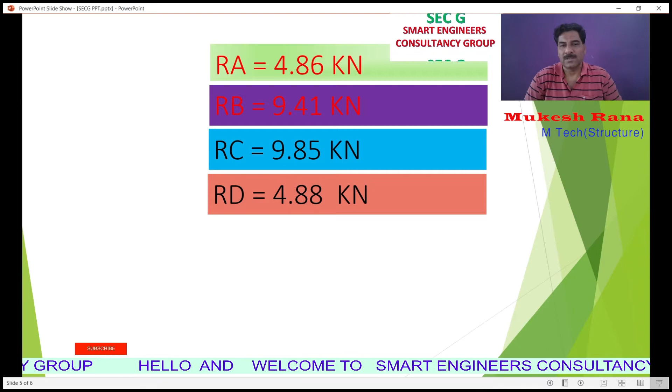As you know, point A and D are simply supported, so moment at this point will be 0.

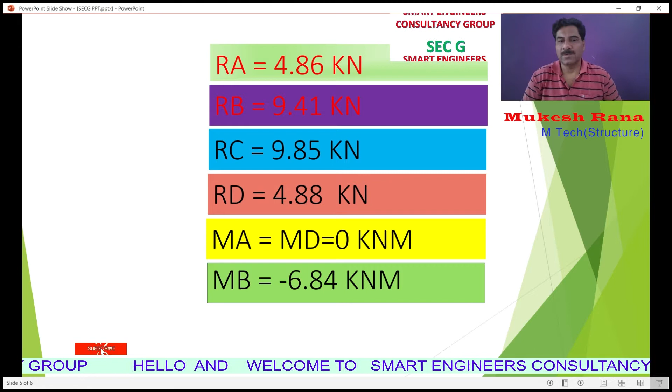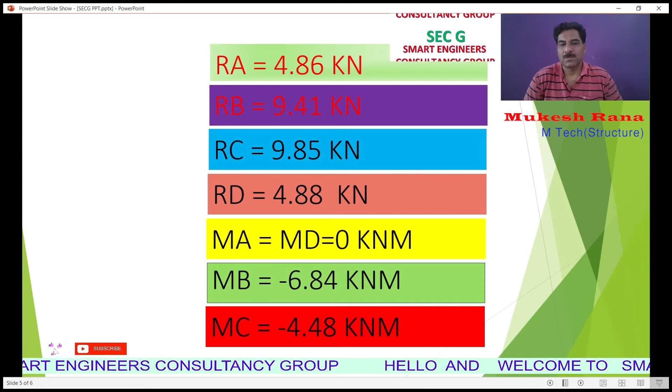Bending moment at point B will be minus 6.84 kilonewton meter, and bending moment at point C has come out minus 4.48 kilonewton meter.

Let's start the same problem on the software STAAD.Pro CONNECT Edition V22. Okay friends, so we have come to our software panel.

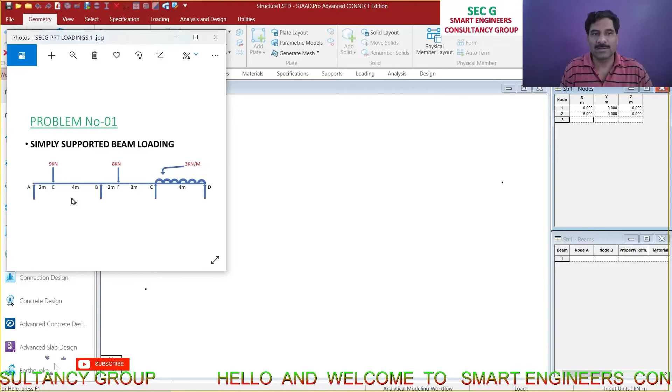So I will provide here 0 0 0 first of all. After that I will provide 6 0 0. After that you can see I will provide 11 meter, so 11 0 0, and after that is 15 0 0. Now you can see 4 nodes are created.

So you go to view, go to front view, and select the node cursor and make your beam. Now you go to geometry, go to beam layout, click here on OK. Now you can see your 3 beams A, B, B, C, C, D are created.

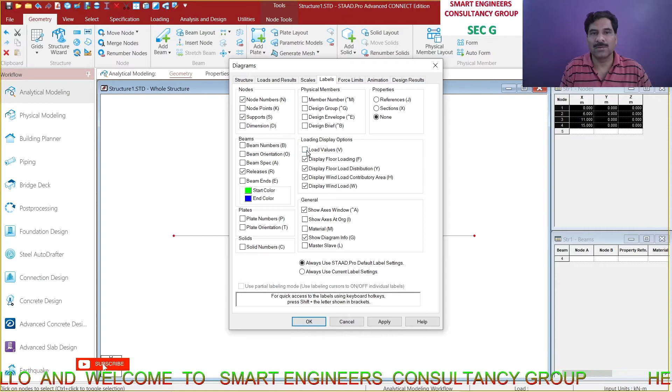Now if you want to give node numbers, then click on labels, click on node number and load values also, it will be utilized later. Now apply, click on apply, click on OK. Now you can see 4 nodes A 1 2 3 4 have been created for these 3 beams.

If you want to show the length of this beam, then go to utilities, click on beam tools, click on dimensions, click on display, and you can see your 3 beam lengths are displayed here. Click on close.

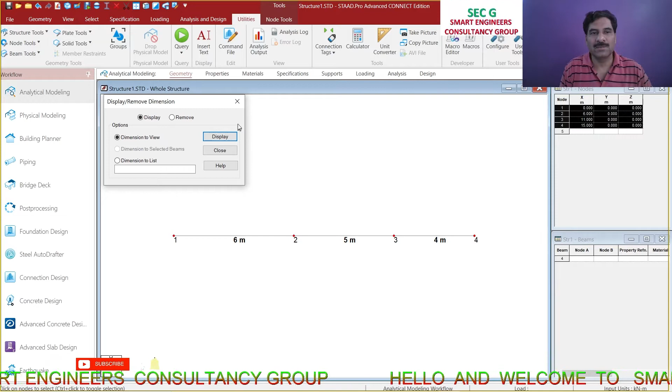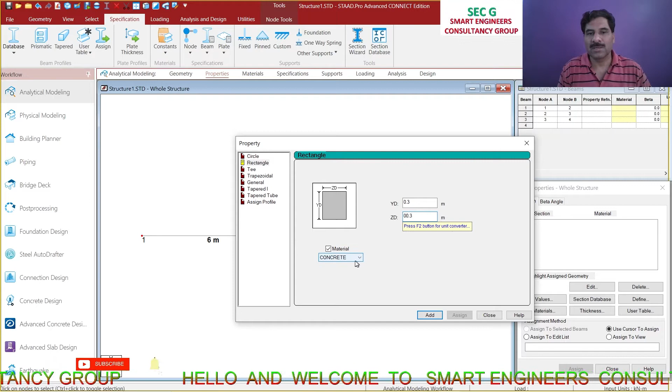Now we have to provide properties for these beams. So click on property, click on define, click the rectangle or whatever section you want to give. Now I provide section 0.3 meter by 0.3 meter, and I have selected concrete here, or whatever material you want to select from here. Now click on add button and click on OK.

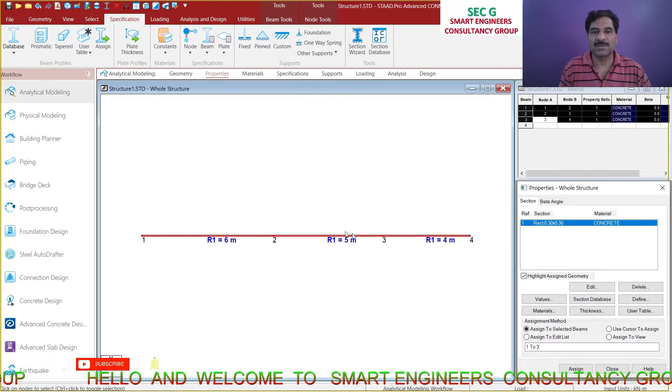Now you can see this concrete material has come here, so now we have to assign it. So select it, click on assign to view, click on assign and click on yes. Now you can see all 3 beams are assigned with this concrete material.

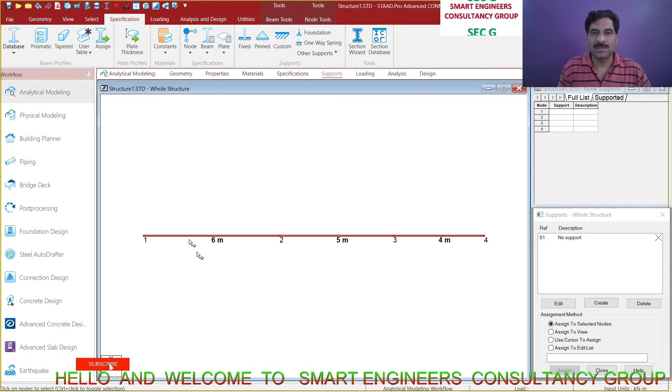And for the next step I select supports. Here we provide the supports for our beam. As all supports are simply supported, I will click on create. I will select fixed but release in other directions except Fy, because all these supports are fixed in the Y

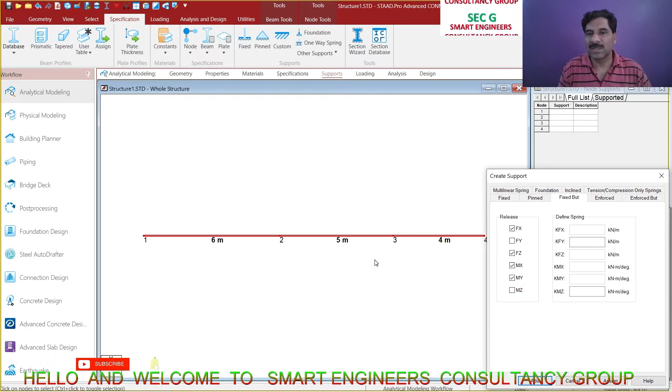direction. So I will click on add, select support and click on assign to view. Click on assign, click on yes. Now you can see your supports at 1, 2, 3, 4 are assigned here. Now we have to provide loading.

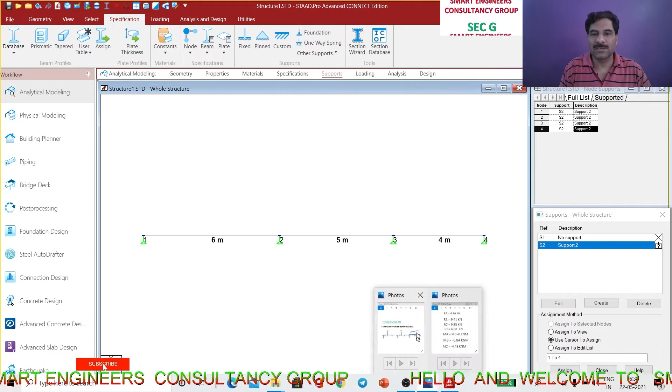For loading, if you look at the figure, you can see a 9 kilonewton load, 8 kilonewton, a 2 meter distance is given, and a 3 kilonewton per meter UDL is here. So I will select loading. Click here, click on add and give whatever name you want. I will provide live load here as LL. I will click on add.

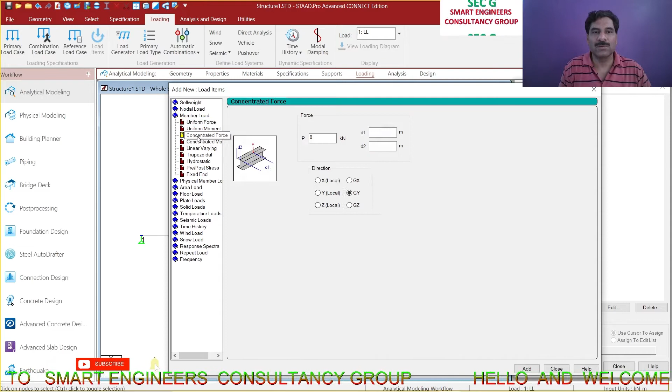Now close it. Now click live load, click add, click member load. Now if you want to give a point load, go to concentrated force and provide, as you can see, 9 kilonewton and 8 kilonewton. So you provide minus 9 kilonewton at a distance of 2 meter, d2 0, and in direction Fy global Y. So click add.

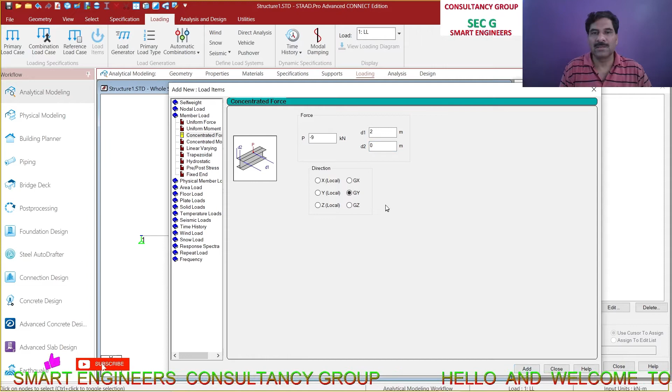Another load was 8 kilonewton and the distance was the same. You can see here it was 2 meter also in beam 2. So this is right here. So click here and write 8 and click on the add button.

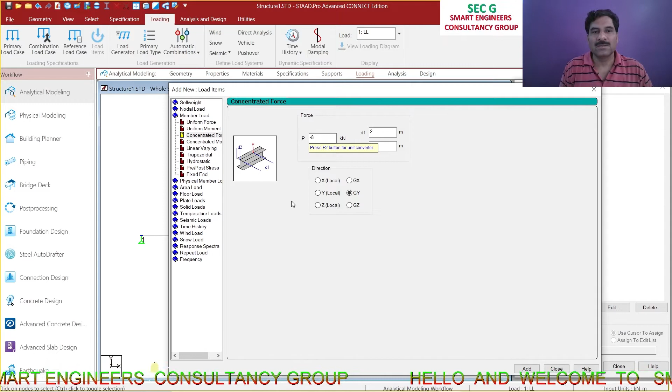Now we want to provide the UDL. So we will go to uniform force, enter minus 3 kilonewton per meter, and there is no need to write any distance, as the whole beam is provided 3 kilonewton per meter. We will select direction global Y and after that click on add, click on close.

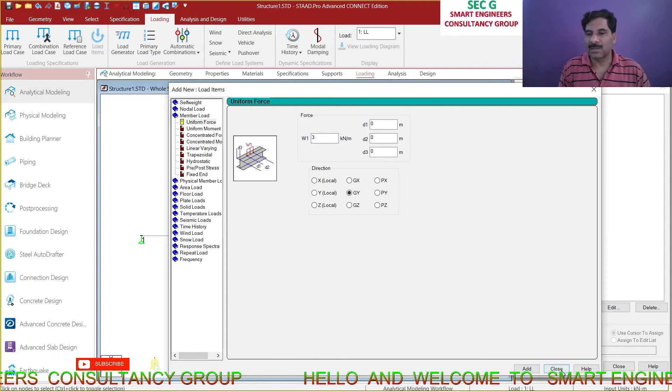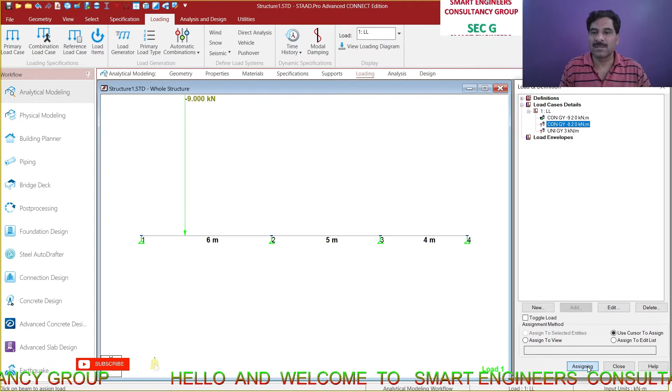Now you can see these 3 question marks are here. It shows that these loads are not yet provided. So select the first load, use cursor to assign, and assign it to beam number 1. Click here, then follow the same procedure for the second beam. Select it, assign, go to beam number 2. Select the third load, assign, go to beam number 3.

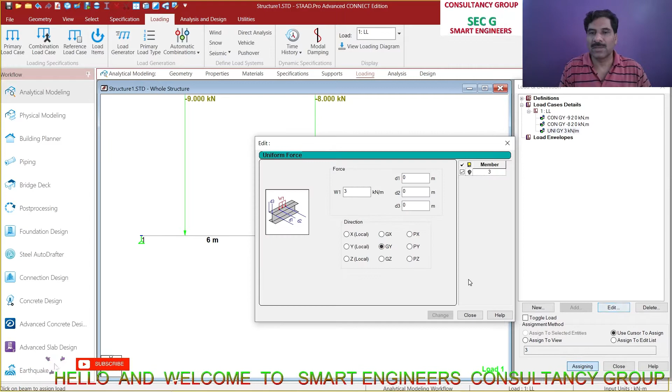Now you can see this force is in the opposite direction because we have not provided minus here. So we can add it: click on edit, enter minus 3 and click on change. Now you can see the load has changed direction. You can change the direction of your load in whichever direction you want to apply it.

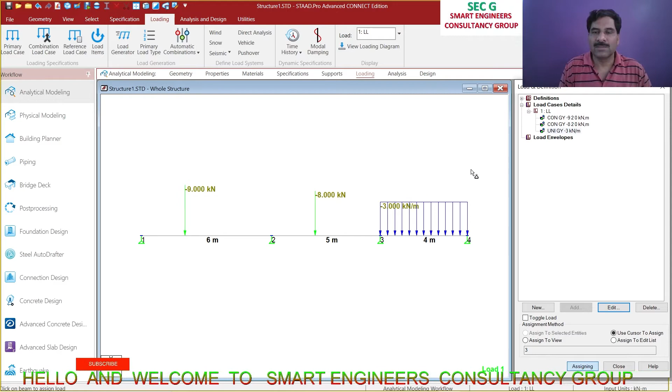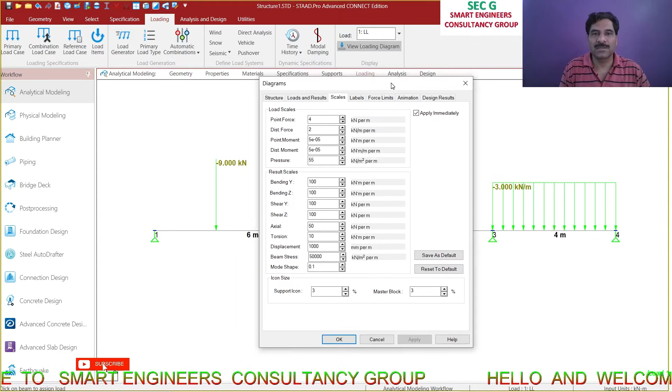So click on loading diagram. You can see your loading diagram is visible to you. If you want to scale your loading diagram, go to scale, apply immediately and select distributed force or point load, whatever you want. I want to make this 3 kN/m smaller, so I have increased the scales, and you can do it as you wish. Click apply, click OK. Now you can see your figure is visible easily.

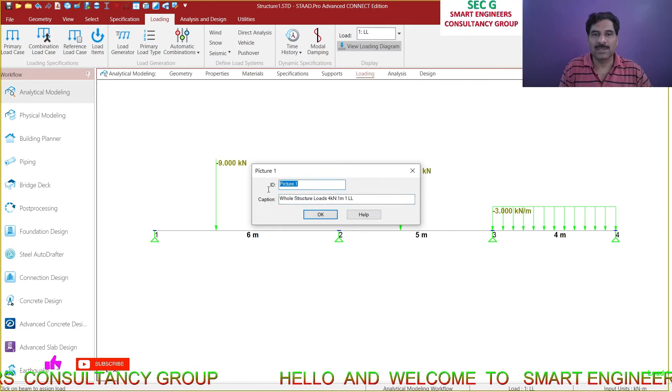If you want to take a picture, right click the mouse button, click take picture and write a caption here. You can give any name. I have given loading here. This will be used in our reports. Now we have applied load, assigned the load and assigned the supports.

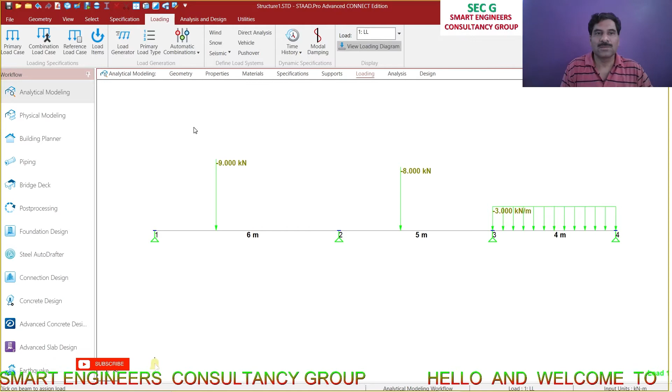Now we will go to analysis, click on define command, click on no print, click on add, close. Now go to post analysis command, click on define command, bring this load to the right side, click on add button. Then click on reactions, click on add, click on analysis, click on add and close. You can see a question mark here, so you have to assign these supports.

So select these support reactions, go to assign to view, click on assign and click on yes. All these supports are assigned by the software. Go to analysis, click on save. Now you can see 0 errors, so you can see your output here also. Now if you want to see the report, click on report.

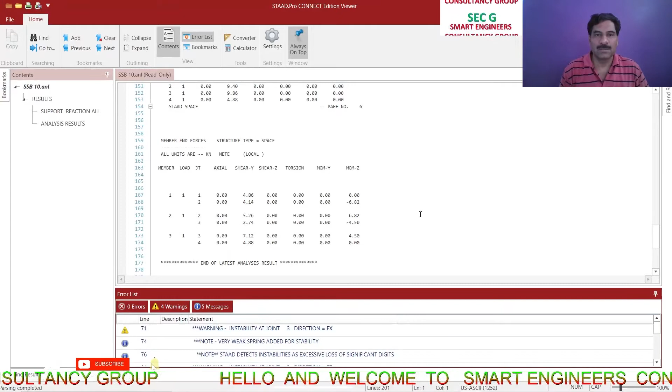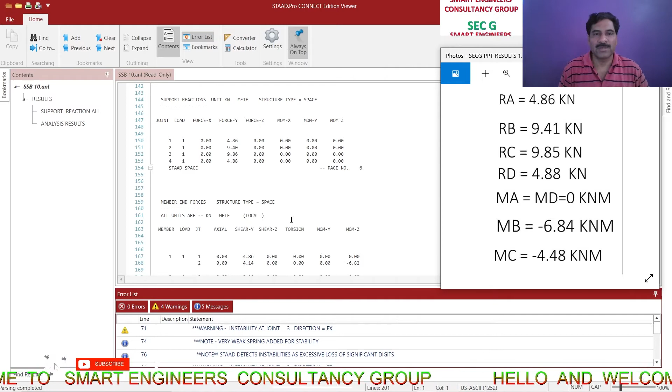Now you can see the printed report is visible to you, so you can compare the software results with the manual results. So I want to show you here the manual results. So now you can compare these results with the software and the manual. You go to reactions. Now you can compare: RA is 4.86, this is 4.86; 9.40, this is 9.41; and 9.86, 9.85. So these are similarly the same.

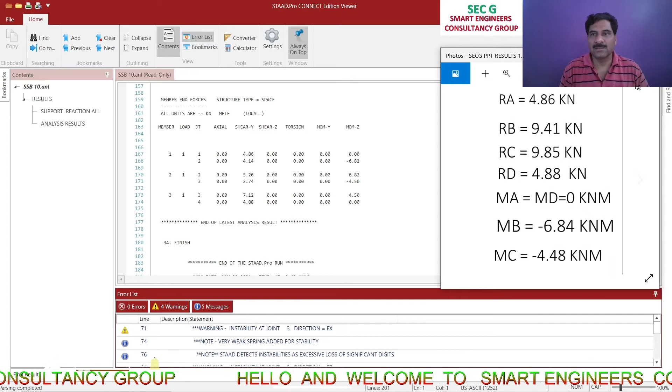Now you can check bending moments also. You can see at point A and the last point it is 0, and at point 2 it is minus 6.82, and here it is minus 6.84, and here it is 4.48 and it is 4.5. So the results are almost the same, so it is satisfied. So now you close this report.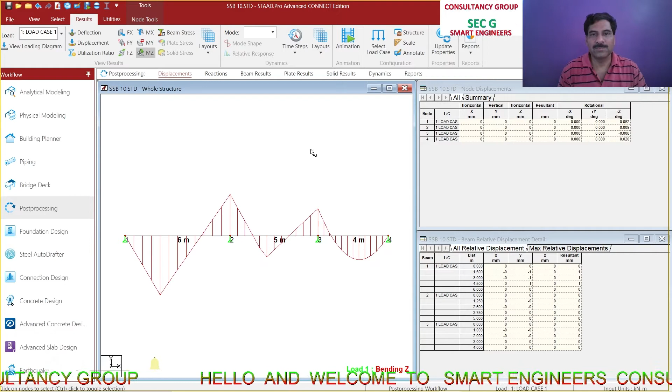Now go to post processing. Now click on load case 1, apply, click on OK. If you want to see the bending moment, then click here and scroll your mouse button. Now you can make it larger. If you want to see this bending moment numerically, then click on annotate and go to beam results, click on bending ends and bending at midpoint.

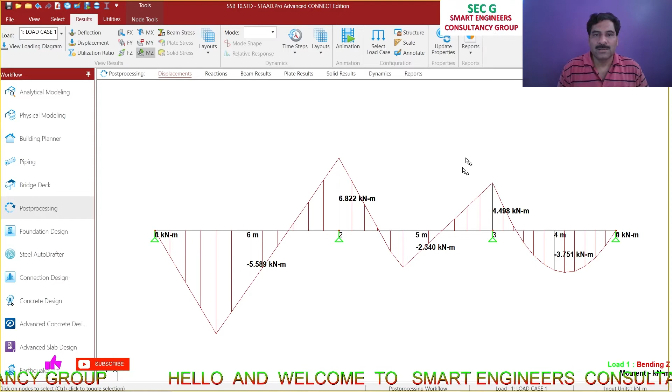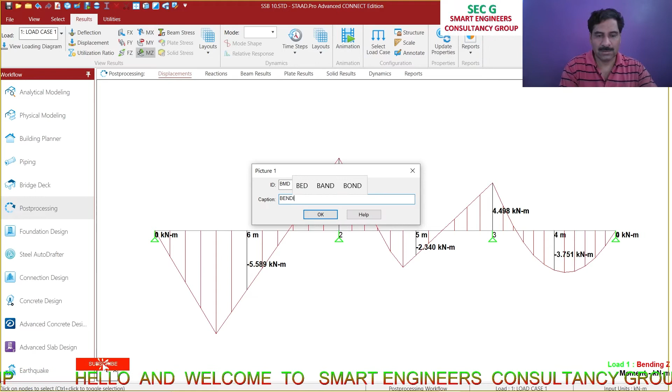Now click on annotate. Now you can see your results are numerically visible to you. So you take a picture of it, it will be utilized in our report. So right click here and go to take picture, give its ID name just like BMD, and give its name also and caption bending. Okay, now click on OK.

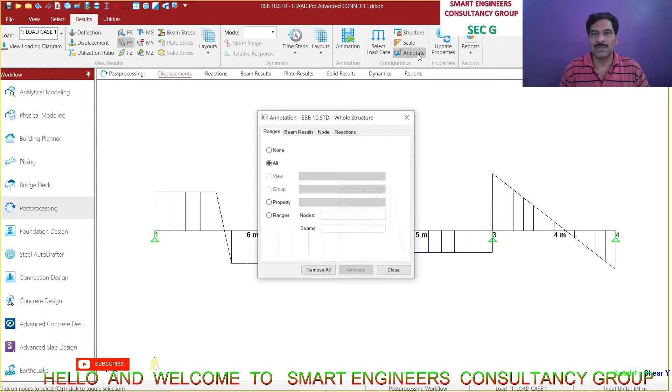So it is ready. Now if you want to see the shear force, click on FY and follow the same procedure like this. We are scaling it, so its figure is increasing here. So now if you want to see the numerical values again, then click on annotate, go to beam results, click on midpoints and ends for the shear and click on annotate. Now you can see results are visible to you. So you take a picture of it also.

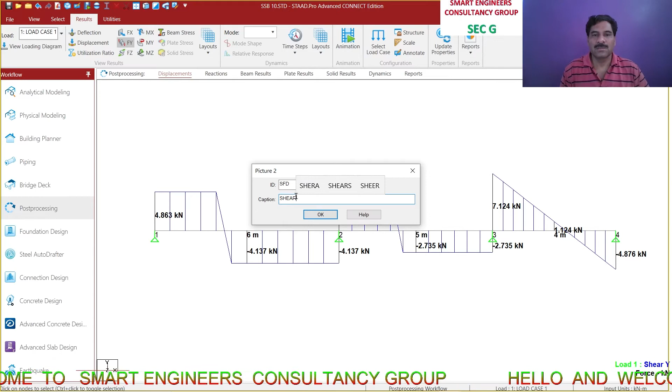Go to take picture, give name SFD, or whatever name you want to give, shear. Click on OK.

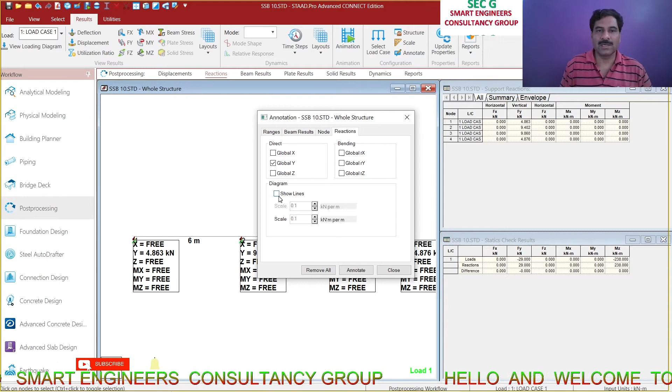Now if you want to see the reaction, then click here and click on annotate, click on reactions, uncheck all check boxes except global Y, because we want to see the results in global Y direction, and click on diagram lines, and decrease the scale, then it will be increased. Now click on annotate. Now you can see your beam reactions are visible easily.

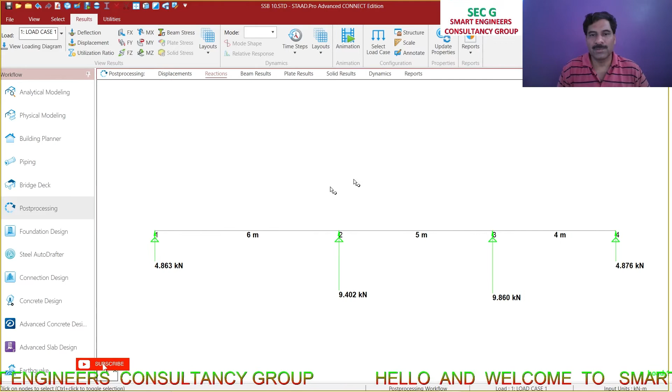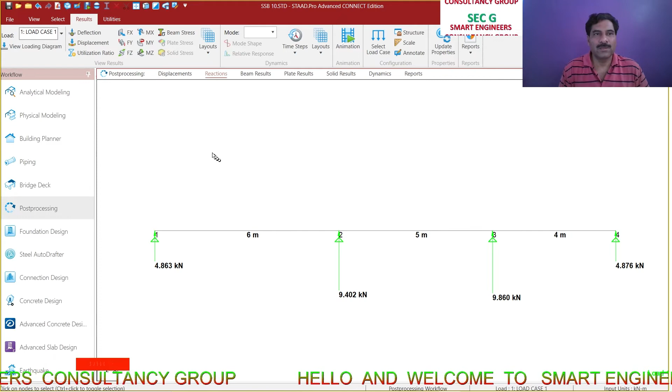Now right click, take picture, give its name reactions, give caption as reactions, click on OK. Now your report is ready. If you want to take displacement also, you can see the displacement.

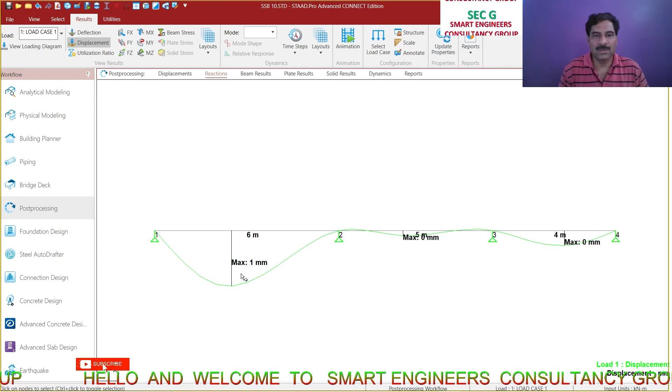That is, go to beam, first of all you click on displacement maximum, annotate. So you can see this elastic curve is here, so only 1 mm deflection is there, so this displacement is within limits. So take its picture also, give name ELC, write here whatever name you want.

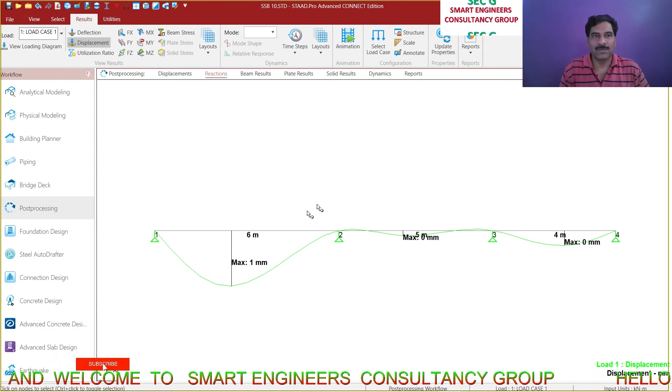Now we have to provide our report, so click on report. Now the job information is already on the right side, so it will be shown to you easily. Now you click on output, click the information whatever you want to present to your client. So you click on reactions first and bring it to the right side, and again beam end forces, maximum moment and maximum shear force, you bring to the right side, and go to pictures and select all the pictures and bring them to the right side.

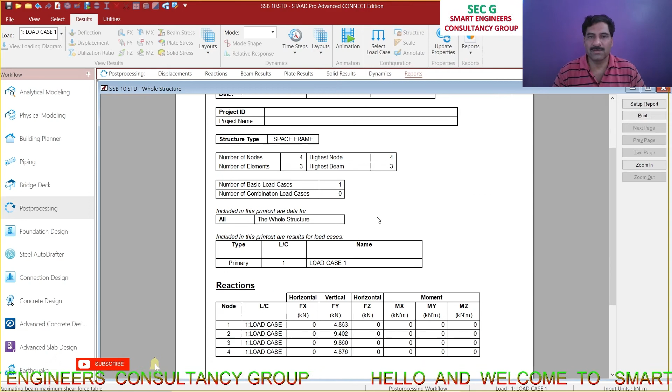And now you can adjust these figures according to your report. So I want to give reactions at the top like this, BMD here I want to put, click on OK. Now your report is ready. The job information you have given first, like name and project name or other requirements, will be printed for you, and the results are here also. Now you click on print, and you want to save your file, so give whatever name you want, click on it.

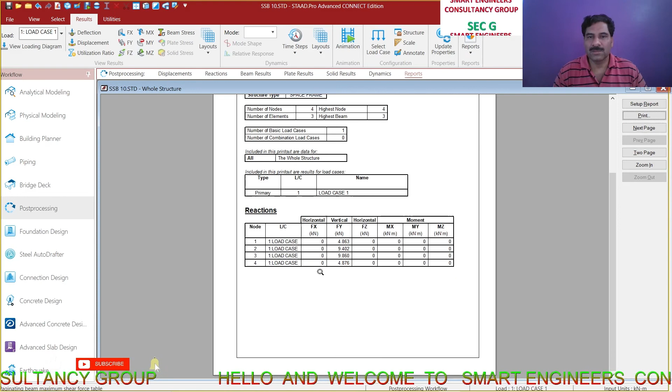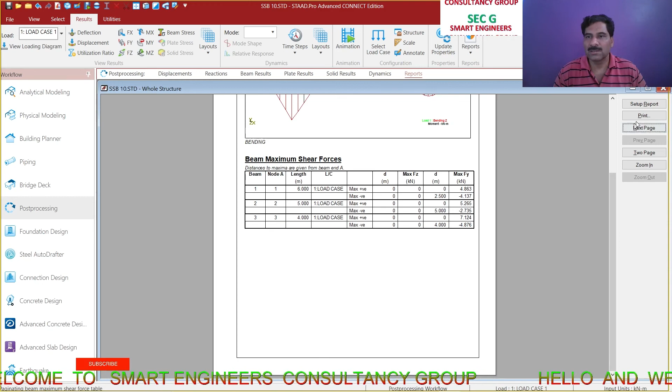Now you can see your report is in front of you with the diagrams. Now you can see your reactions are here, beam end forces are here. On the next page you can see the bending moment is here and the shear force diagram is here. So now your report is ready to present to your client.